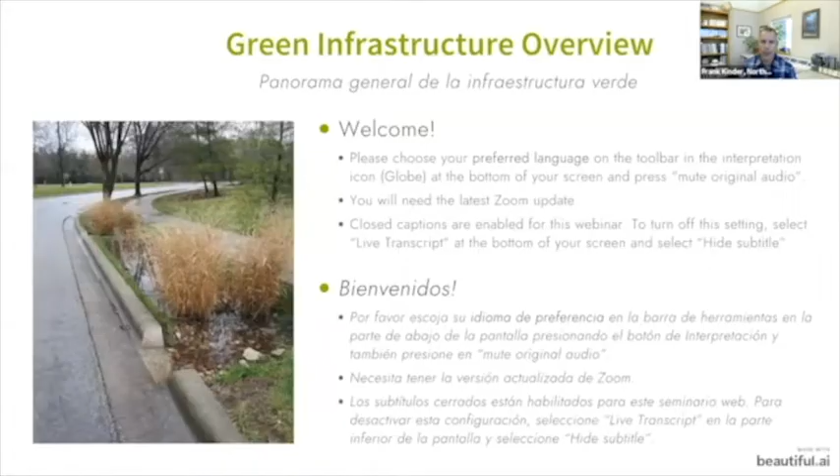Just a quick background about who we are. Northern Water is a conservancy district located in northern Colorado, and we serve over 1 million people in 1.5 million acres along 33 cities. Some of our metrics here are for you to review. If you've been up to Rocky Mountain National Park and seen some of those beautiful reservoirs, the water in those regions is gathered from the crucial watershed, much of which burned last year, making water management and water quality and stormwater management ever more important.

Some of that water is shipped over to the eastern slope, stored in large reservoirs known as Horsetooth and Pinewood and Carter and Boulder, and then delivered to all of these cities. As we receive precipitation on the eastern slope, we seek to manage that so that we can get good quality and deliver that water downstream.

As the supplemental water provider in the region, we have an obligation to help people understand and appreciate the scarcity of water and what it takes to deliver it, as well as how to take care of it and treat it with respect. We're doing that with you today here.

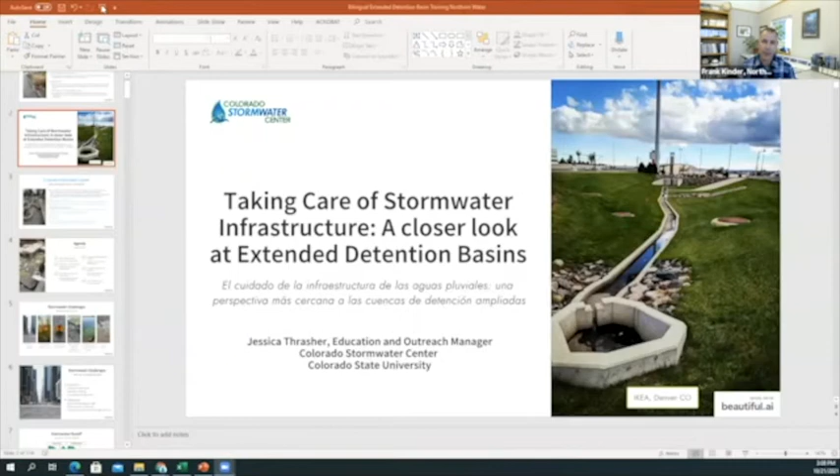The other thing we do is work with communities who have stormwater management needs to transition some of the high water use landscapes in detention basins into lower water use landscapes while retaining their existing performance. That basin you see on the right is using Kentucky bluegrass, irrigated and maintained through mowing and chemical treatments. It's possible this could be transitioned into a native turf, which would still perform the same quality requirements at the end of the day with a little less input from natural resources.

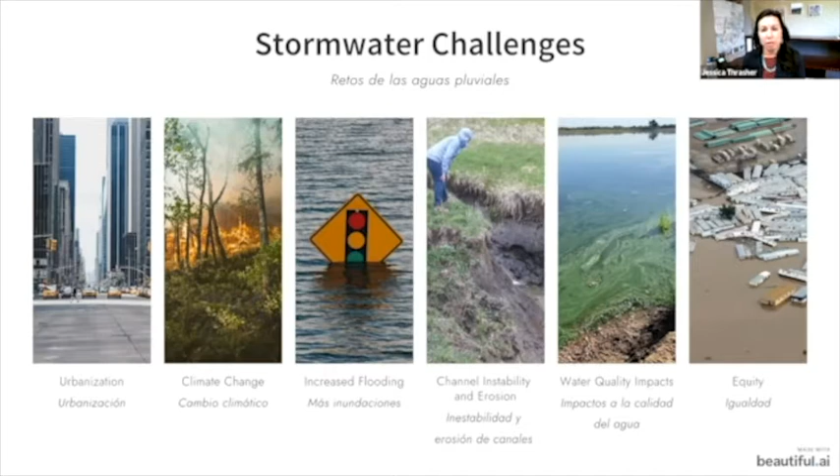To start, let's discuss the stormwater challenges we're seeing in our environment. The first one is urbanization. With urbanization, we see the removal of green space. As our cities expand, we are paving over areas that were previously vegetated, and so we're getting decreased infiltration as a result. Because of that decreased infiltration, we're seeing increases in stormwater runoff.

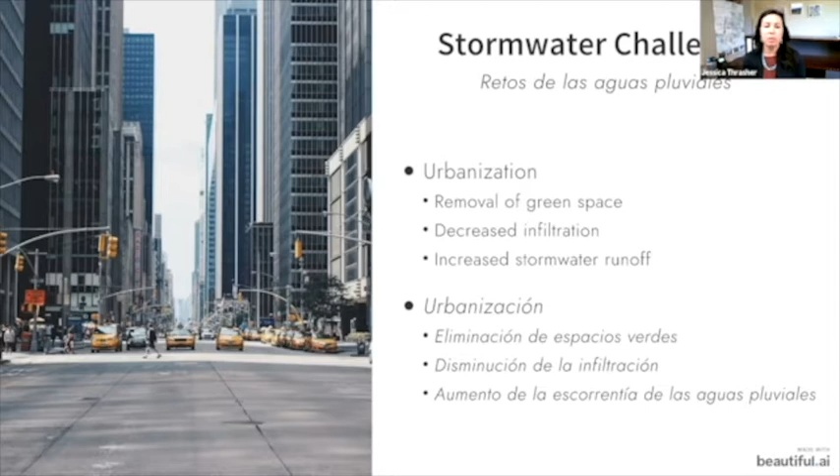One reason we need to address stormwater is because of the pollutants it picks up. As rain hits your roof and runs down into downspouts and across pavements, driveways, and parking lots, it picks up pet waste. Fertilizer is a huge issue as people fertilize their lawns. Frank mentioned a way we can decrease some of that need for fertilization by transitioning to native grasses. Motor oil is also picked up in stormwater, along with detergents and chemicals, and all of this is deposited into our waterways unless it is first cleaned by a stormwater control measure.

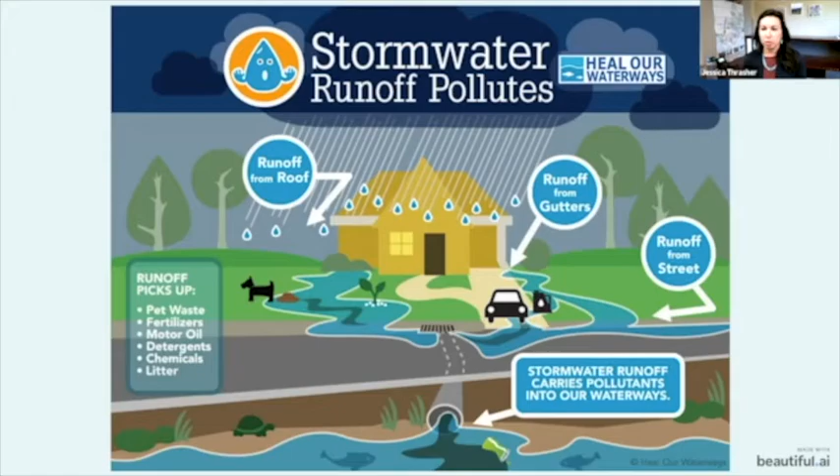In addition to urbanization, we also have climate change as one of the challenges with stormwater. With our droughts, we're seeing drought as more of the norm instead of the exception. This impacts our forests, because our forests are more dry. And when we have fires like we saw last year, it's a hotter wildfire and it lasts for a lot longer, because the trees aren't able to withstand the normal fires they had previously.

There are a lot of impacts on water quality with fires. If you want detailed information, I encourage you to check out the Stormwater Symposium. But when a wildfire burns extremely hot, it makes the soils hydrophobic. They're no longer able to accept that runoff or moisture. So when the snow melts, that water runs off of those soils in burn areas, and it picks up sediment and debris, depositing it into our rivers.

This becomes a very major issue on a lot of different levels, but just at the municipal level, Northern Water has been doing a lot of work on this. If there's a certain amount of sediment and pollutants in the rivers, it's very difficult for water providers to remove those sediments because it creates difficulties in their system. So the city of Greeley had to actually let water flow down the Poudre River this year and not remove it, because it had too much contamination from those burn areas. This is a substantial impact on our water.

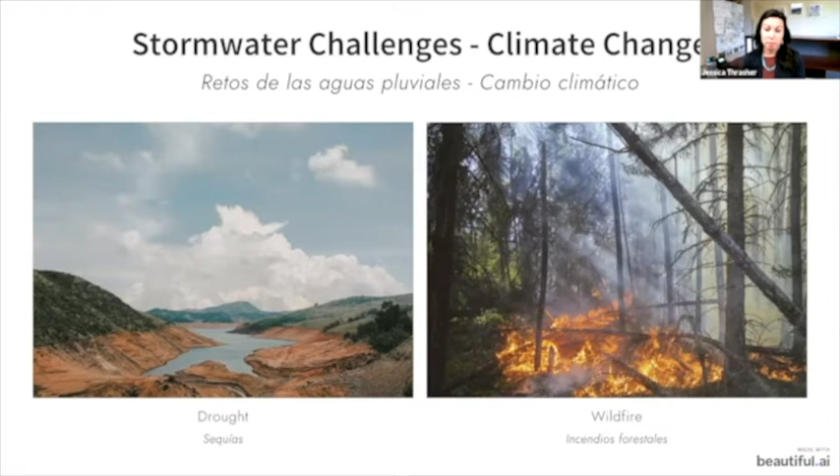We also have flooding issues with that increase in stormwater, as I was mentioning before. This looks like nuisance flooding, which causes damage to property and creates dangerous driving conditions. It also affects cities—if you want a walkable city, but the sidewalks are flooded, you're not able to do that.

In addition to nuisance flooding, which makes things more dangerous with minor property damage, catastrophic flooding refers to the complete loss of property or loss of life, like we saw in the Poudre Canyon earlier this year. Additionally, you can have channelization occur with this higher volume of water.

Channel instability and erosion is an issue because as stormwater flows across a vegetated surface, that water infiltrates into the vegetation. When it does that, the pollutants in the water are removed and trapped in that soil profile. As that water goes down into the groundwater, it is cleaner.

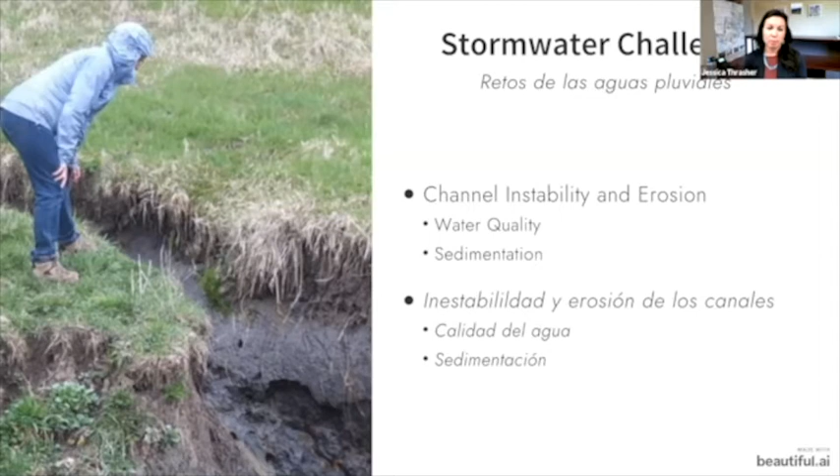When you have channelization and water cuts a path through that vegetation, those contaminants are released into the water once again. And then you have the additional component of sediment also being added to the water.

When the fertilizer and other contaminants reach our reservoirs and bodies of water, we have the potential for algal blooms, which cause hazards to human, pet, and aquatic health.

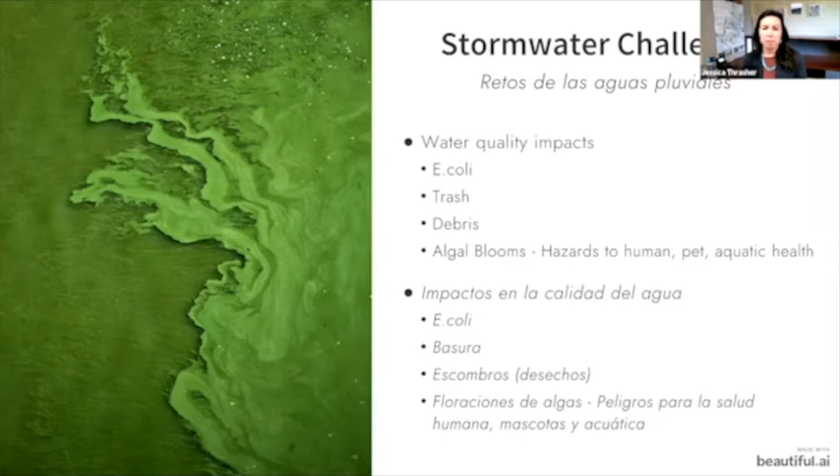Finally, along with these stormwater challenges, as we have climatic changes—increases in drought, increases in flooding—those challenges impact our vulnerable populations the most. So one of the challenges we're seeing right now is around equity. As we make adjustments to our stormwater infrastructure moving forward, we need to ensure that vulnerable populations, especially in low-income areas, are brought into the conversation so that we can have sustainable infrastructure moving forward.

Okay, now I'm going to start talking about the different types of stormwater control measures. Extended detention basins are only part of one of the different types. So we'll go into what those different types are and then focus in on extended detention basins.

The Mile High Flood District, which was previously the Urban Drainage and Flood Control District, created this 4-step process for stormwater management. Step 1 is to reduce runoff, which can be achieved by LID, low impact development, or MDCIA, which is to minimize directly connected impervious area.

Directly connected impervious area is when you have your roof connected to your aluminum or steel downspout, to your concrete sidewalk or driveway, to your concrete curb and gutter system, to your concrete or metal piping. That is directly connected impervious area, where nothing is able to infiltrate. So by reducing the directly connected impervious area, you're allowing more opportunities for that water to infiltrate. That's step 1.

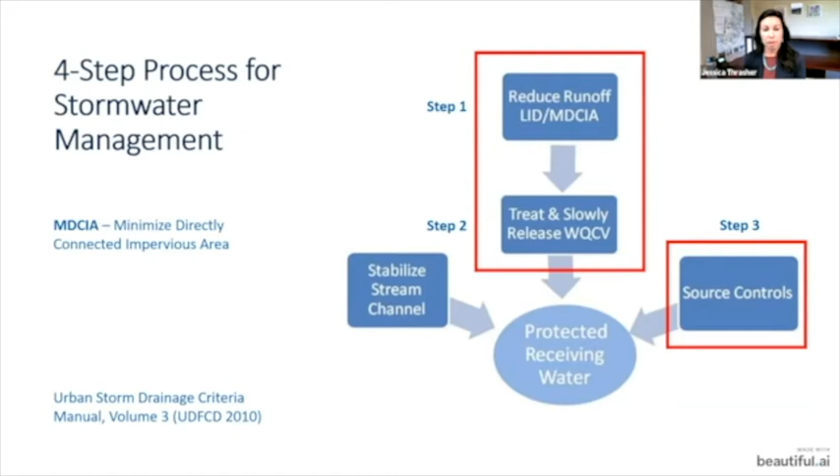We're not going to talk about step 4, which is stabilizing the stream channel, but that's another step for stormwater management. I know this lettering is very small, but you'll receive this slide later to look at in greater detail.

Stormwater control measure classification is below, and I want to read this to you: a permanent water quality stormwater control measure is a facility designed to reduce stormwater runoff, peak flow, and/or pollutants before they discharge into receiving water. That's how it's defined.

There are three different classifications we talk about with stormwater control measures. The first is sedimentation - extended detention basins fall under this classification, as do constructed wetlands and wet ponds. The next classification is filtration stormwater control measures, which include rain gardens, sand filters, and permeable pavement. The final classification is volume reduction, which includes grass swales, grass buffers, or green roofs. Proprietary systems are underground systems, and they're their own special classification.

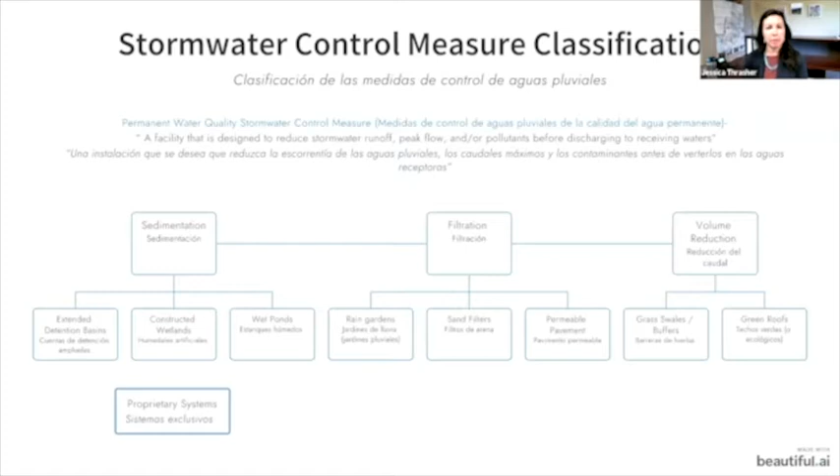You also cannot use mitigation wetlands as stormwater control measures for the same reasons. So constructed wetlands are a specific type of stormwater control measure used for that purpose, but they have the additional benefit of providing many of the same benefits as a natural wetland. Similarly, wet ponds and retention ponds are also a sedimentation SCM example.

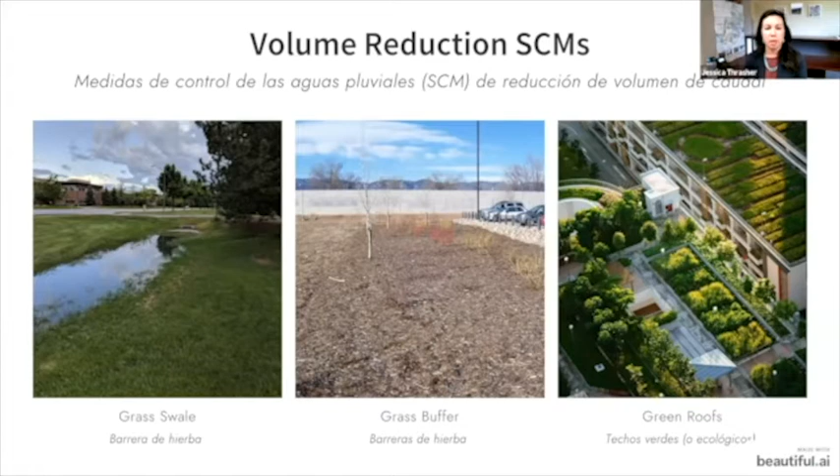Stormwater control measures are required by the Clean Water Act, especially for municipal separate storm sewer systems, or MS4 permits. When those are issued, they're regulated by the Colorado Department of Public Health and Environment, or CDPHE. As part of this permit, you are required to maintain the stormwater control measures to ensure long-term sustainability or operability, and there are audits conducted by CDPHE or EPA to ensure they are being maintained and operating correctly.

Why is maintenance needed? Maintenance is needed on stormwater control measures because they are designed to capture and slowly release stormwater, and as they do so, particulates drop out of the water - that's their function. If you don't clean them out regularly, they contribute to more pollution downstream. A clogged outlet structure, which we'll discuss in detail later, can result in standing water because the water cannot get out through the outlet, or water bypassing the stormwater control measure and being released inappropriately. That water is not being treated, so it becomes a source of pollution.

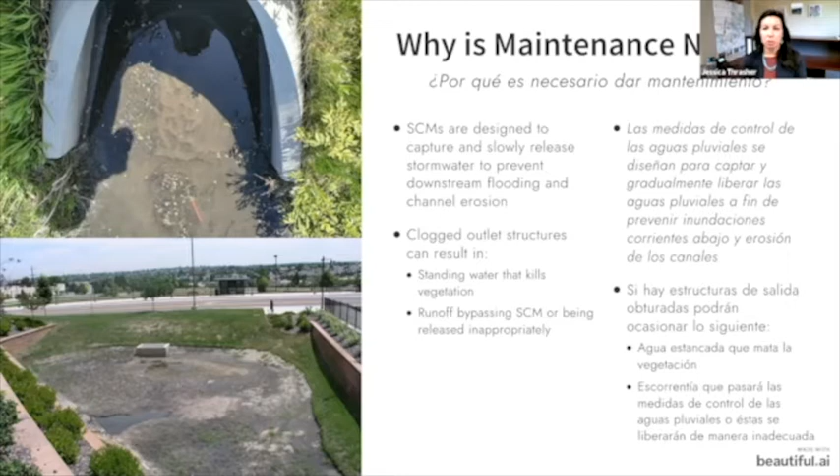As I was saying, stormwater control measures are designed to remove trash, debris, and pollutants from the water. If they are not treated, then they add more pollutants than they remove, and that is not the goal of stormwater control measures.

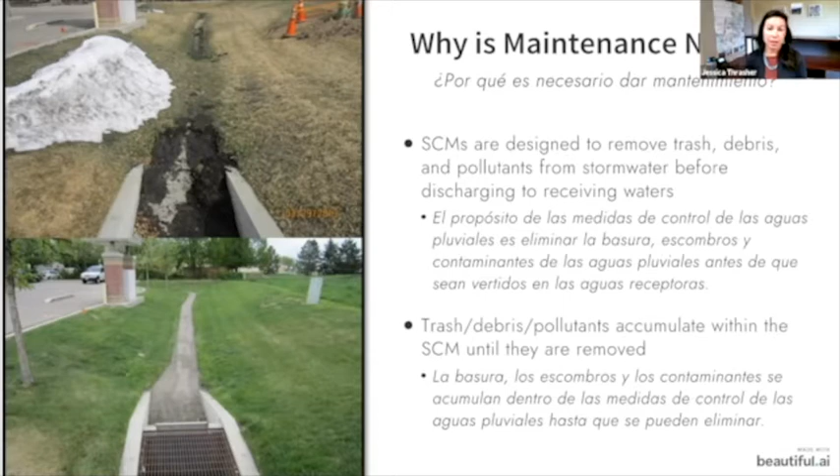As you can see here, this one has not been maintained correctly. The water that comes in is relatively clean, but the water that goes out is dirtier than when it entered, because it's clogged and not performing as it should. Especially if these are in HOA areas or areas that benefit the community, this becomes unsightly and unattractive, and not something people want to be around.

Stormwater control measures are not being maintained usually because it's believed to be too expensive. The owners don't know that they're responsible for the maintenance, or they don't even know that they actually have this stormwater control measure on their property, that it's theirs and that they are responsible for that maintenance and inspection.

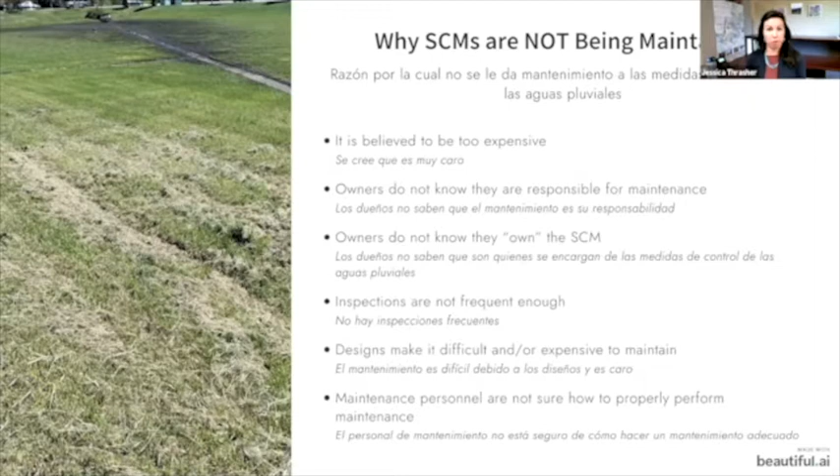Potentially it's because inspections aren't frequent enough, even if the owners do know they own it and are required to maintain it. Inspections happen at irregular intervals, so they don't know what needs to be maintained. There are some older designs that made maintenance very difficult and expensive. And finally, maintenance personnel are sometimes not sure how to perform the maintenance or what the extended detention basin needs, which is why they're not being maintained to that level.

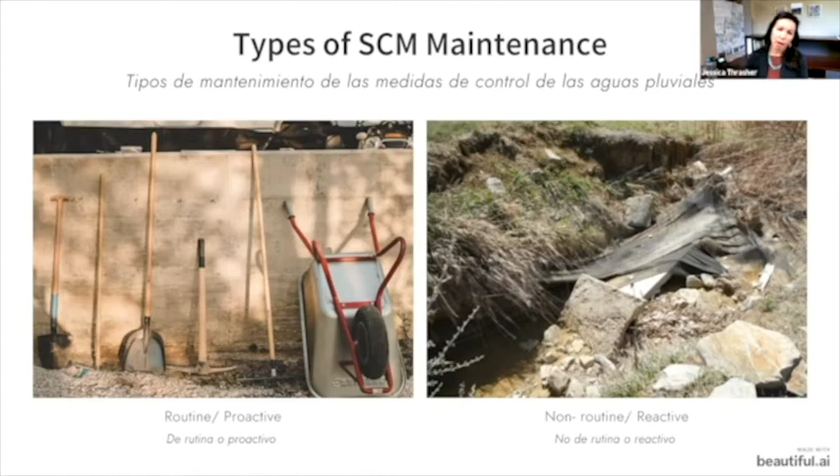There are two different types of maintenance: one is routine or proactive maintenance, and the other is non-routine or reactive maintenance.

Routine maintenance is the result of frequent inspections. You don't need specialized maintenance personnel or equipment. In some cases, for the SCM, you might just need a shovel to clean out the inlet or outlet, but for a very large stormwater control measure you might need different equipment like a skid steer. You don't need specialized expertise hired to come in and maintain them, and routine maintenance is the lowest cost.

Non-routine maintenance is the most expensive. In this picture, this was at an HOA that was not aware they needed to maintain this property, or thought it was too expensive to maintain originally, which led to them not maintaining it at all.

This is actually a trickle channel, and I'll show you an example of that in a few minutes. But this trickle channel collapsed, and it cost $25,000 to fix it.

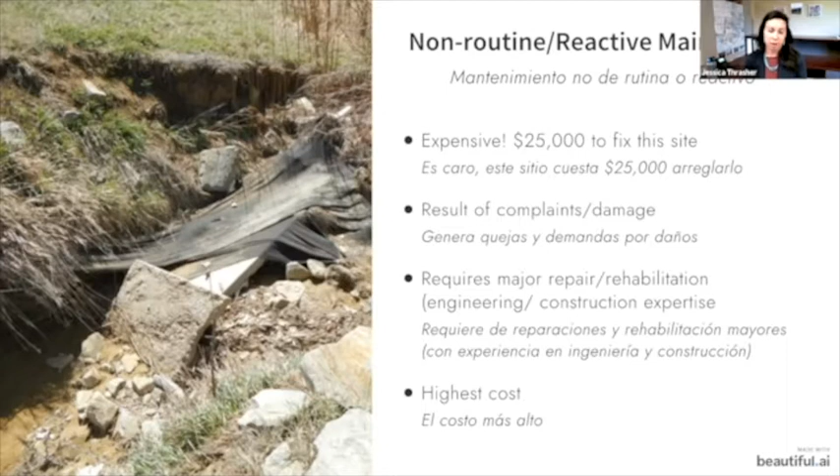When a situation starts to look like this, you get complaints and potential flooding issues. It requires major rehabilitation, and you have to hire engineering and construction expertise to bring in concrete and have it regraded. So it's very expensive, and you don't want to get to this point.

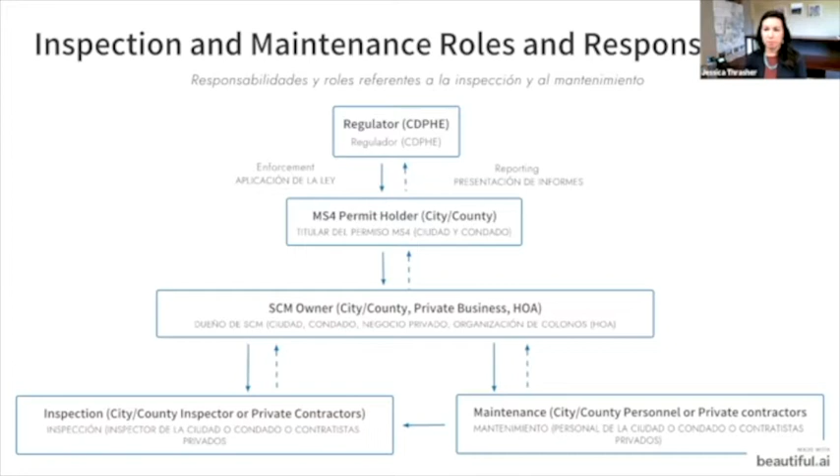For the owner of the SCM, they need to be budgeting for the proper inspection and maintenance. They definitely need to keep all documentation of the inspection and maintenance on site, and then maintain a written maintenance plan as well, because the MS4 permit holder, when they do their audits, that is what they will be checking for.

The inspector, when they go out and inspect, needs to look at what is currently happening, what are the current maintenance needs, but also look to the future to determine what will need to be maintained quickly. The inspector may not know when the maintenance personnel will be coming out, and they may not be close together. For example, if the inspector comes out in springtime, they might notice clogging of the outlet and sediment that needs to be removed. But if maintenance personnel isn't coming out until fall, they'll need to also note that leaves will need to be removed, and additional sediment will have accumulated by that time. So inspectors really need to look at what's currently happening and look forward to see if there are other issues coming down the road until maintenance personnel are able to maintain the stormwater control measure appropriately.

Additionally, identifying any design problems. This could be that when it was designed, for example, the forebay or area near the inlet doesn't allow maintenance personnel to get in there with the appropriate equipment they need. So if the inspector notices this and talks to the owner about it, saying it would be cheaper to do a small redesign of this area so maintenance is cheaper in the long run, the owner might take that under advisement. That could really help the long-term sustainability of that stormwater control measure.

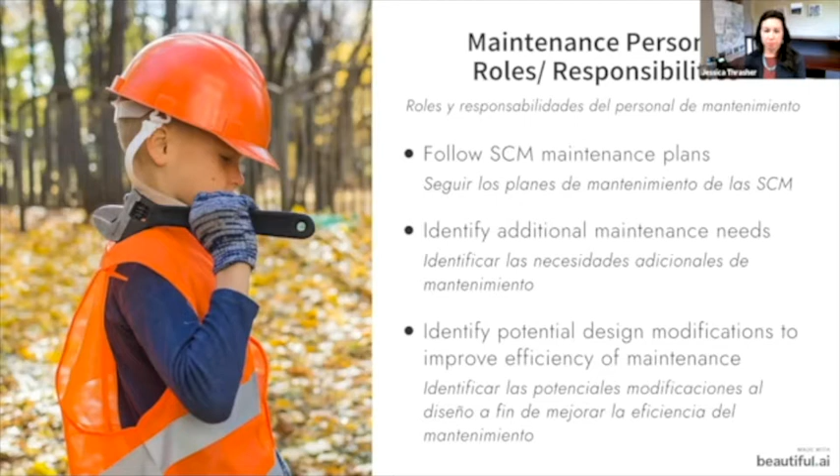Landscape contractors also play a great role in this. They are on site and potentially see the stormwater control measures multiple times during the summer months, and potentially in fall or winter months as well. So when you're out there, look for the stormwater control measures at the sites you're visiting. You can be a point of education for owners, letting them know they are responsible for inspection and maintenance of their stormwater control measure. You could even offer services to inspect and maintain these, serving as inspectors and maintenance personnel for privately owned stormwater control measures. We have a certification course for inspecting and maintaining, which is one way you could add to the services you offer your clients.

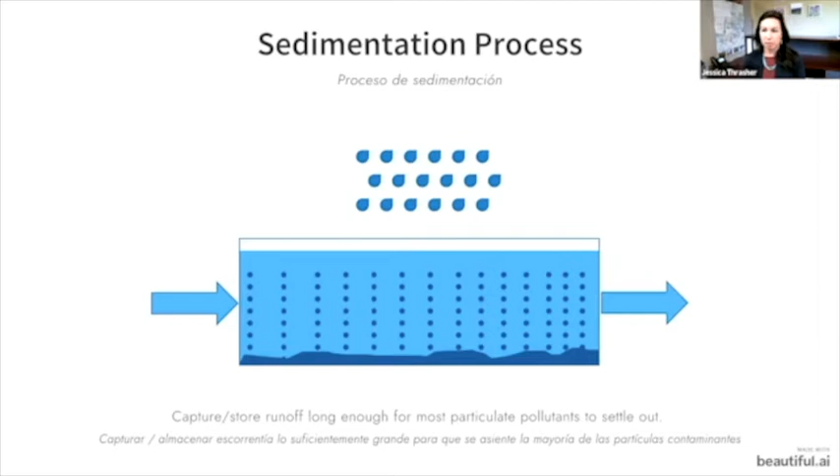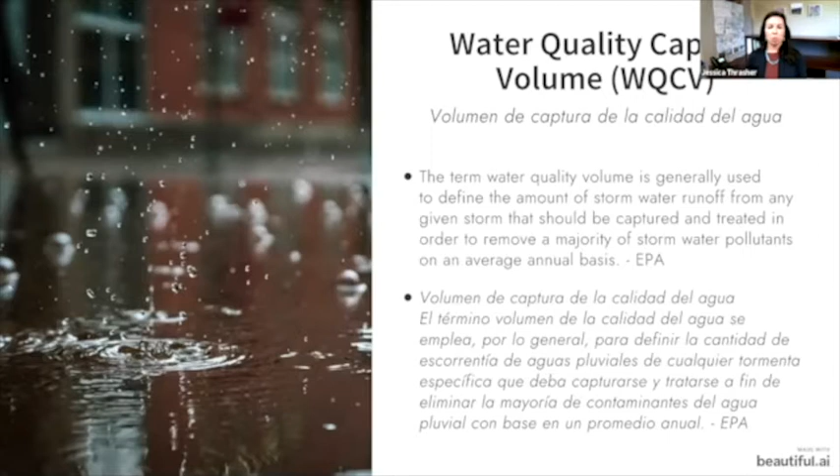Earlier, I mentioned the water quality capture volume, also called the WQCV. The EPA defines this as the amount of stormwater runoff from any given storm that should be captured and treated in order to remove a majority of the stormwater pollutants on an average annual basis. So what that means in reality is that the water quality capture volume is designed to treat stormwater runoff 80% of the time. The water quality capture volume looks at the area surrounding the extended detention basin, and it's a calculation used to determine how big the extended detention basin is by how much water will be flowing to that stormwater control measure.

The way that extended detention basin is designed is really only to hold 80% of storms. The reason why it's only 80% is because it was found that that is the most economic way to create the EDB, the extended detention basin, because a higher percentage doesn't really add that much value as far as the water quality capture volume, the removal of pollutants, but it adds a substantial cost. So when people were evaluating how big we need to make these, the civil engineers working on this, that is what was agreed upon, was that 80% of the water quality capture volume, of the storms rather.

Extended detention basins have a 40-hour drain time approximately, if they are only being used for the water quality capture volume, or that 80% of storms. These systems, the EDBs, can also be used for flood control. So in some cases, you will see the water quality capture volume is a lower segment of the basin, but then they are larger or they're deeper because these are designed for flood control as well. And in cases where they are deeper than they would originally be and are for flood control, those need to drain in less than 72 hours.

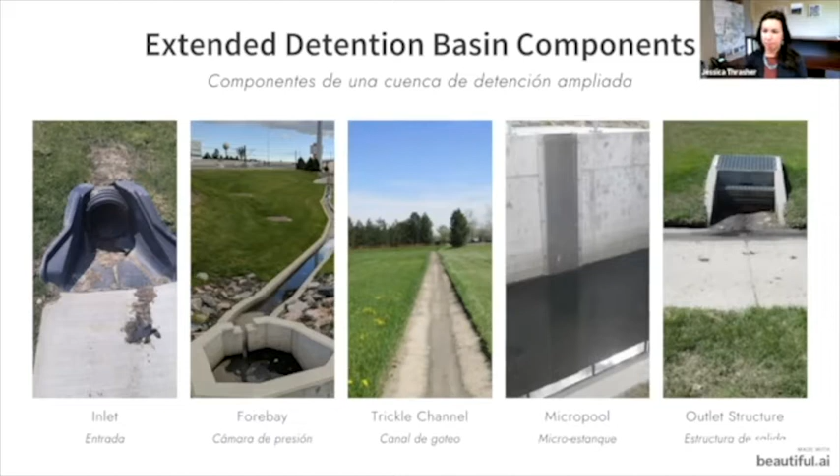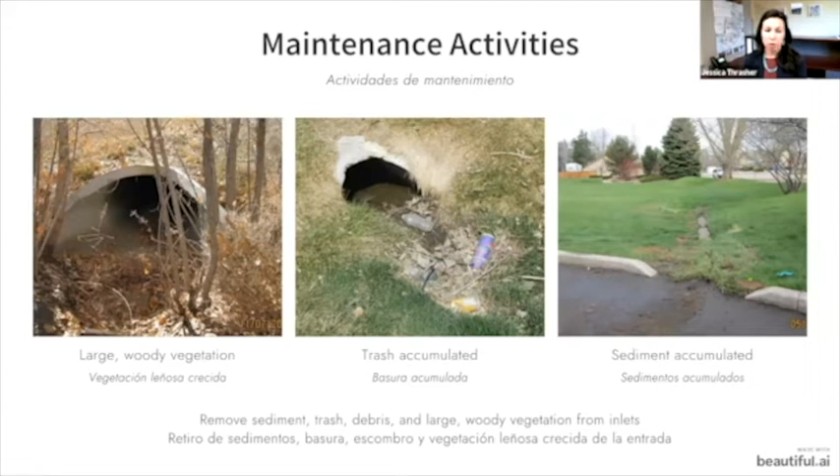This eroded sediment has completely covered the trickle channel. This is a major source of pollution for our water. Since all of this sediment is going into the extended detention basin, it's no longer able to perform at that level of water quality capture volume, because all of that sediment is going down to the bottom of the basin, filling it up. So less water is able to stay in that basin because there's less available space for it to be contained inside.

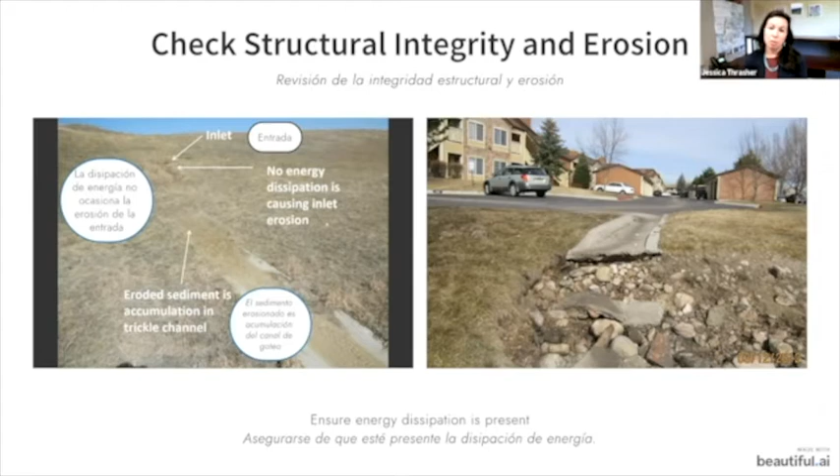Here are some examples of a clogged inlet. One of our coworkers was checking out this inlet and saw that it was clogged upstream. Didn't know why this upstream inlet was clogged, so went downstream and saw the picture on the right. What had happened here is this had not been maintained for so long that it had trash, debris, sediment, and grass growing in there. So the colleague told the owner of this extended detention basin, hey, all of this needs to be maintained and removed. Flooding is occurring upstream, and this is causing issues for water quality.

So what they did was remove all of the trash, debris, and sediment, and then put in these two tiny corrugated pipes, and then put all of the trash back in the inlet, which is not what you need to do. This was not solving the problem at all. The reason why that inlet was constructed to be that size is because of the engineering behind it for that specific size of extended detention basin. So by just putting those two small corrugated pipes in there and allowing a tiny bit of flow to come in, you are going to have upstream issues with that.

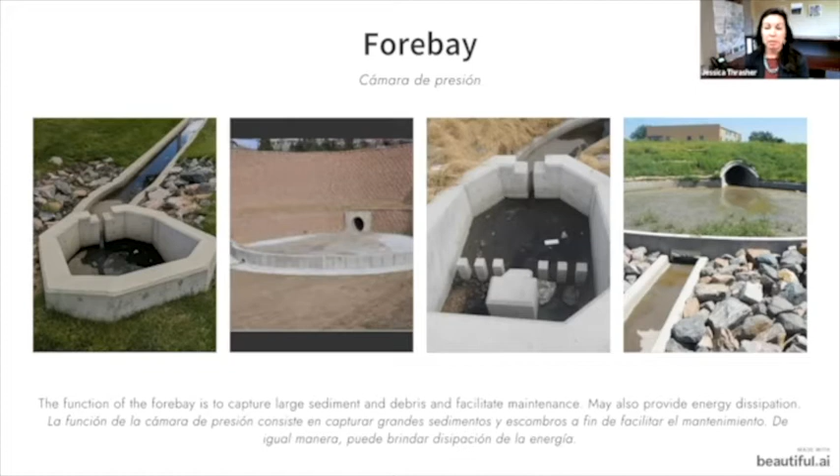Here's another example of some different types of Forebays. These should start looking familiar because in the inlet we did very similar things. You need to remove the sediment and the trash and debris, and make sure there's no large woody vegetation in the Forebay or right next to it. Forebays typically require maintenance once a year.

In the example on the left, this EDB had a Forebay. They were repaving a street that ran into this Forebay, or into this EDB. Then there was a large storm, and a lot of that material was washed into the EDB. Because they had a Forebay, it was captured and collected there. If they had not had a Forebay, all of that gravel would have spread along the very bottom of the EDB, which would have made it very difficult to remove, dangerous to be mowing in there, and in general a really big hassle to maintain. So by including a Forebay, you are making it easier to maintain your extended detention basin overall.

The next example here in the back shows a type of erosion control, kind of like a very large baffle, slowing down the water as it enters this Forebay. Here is that weir once again, the place where the water exits. All of this sediment and vegetation that's in there needs to be removed, and you can probably guess that this Forebay has not been maintained annually.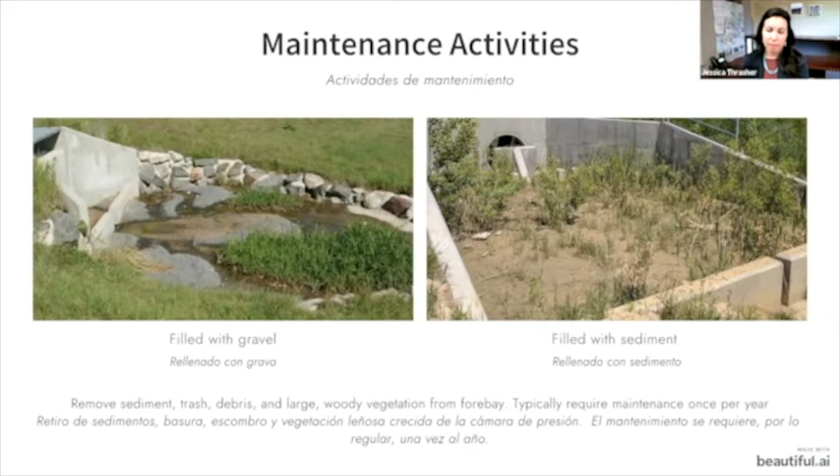One of the questions we get is, how do you know when it's time to maintain your forebay? When do you go clean it out? Usually annually, but if you see ice build up in your forebay, that's usually a sign of sediment accumulation and that you need to clean it out, because it's ponding in there due to the accumulated sediment. Another way to tell is if there's sediment on the outside of your forebay wall, like here—that means the water is pushing the sediment up and out, which is an indication that you need to clean it.

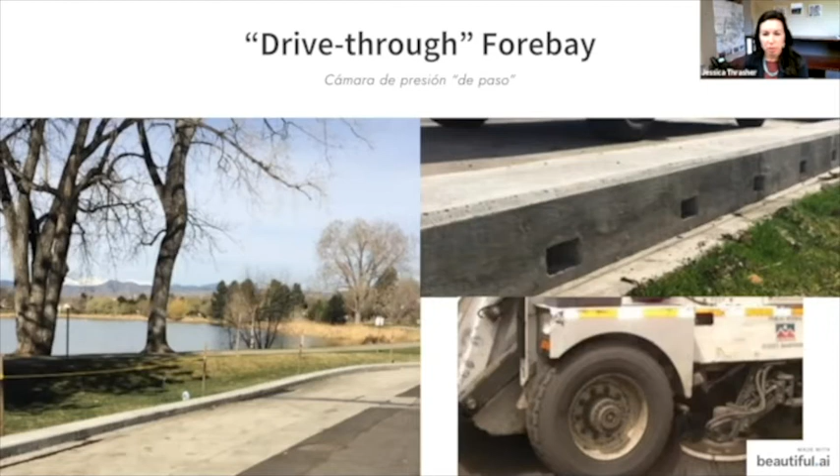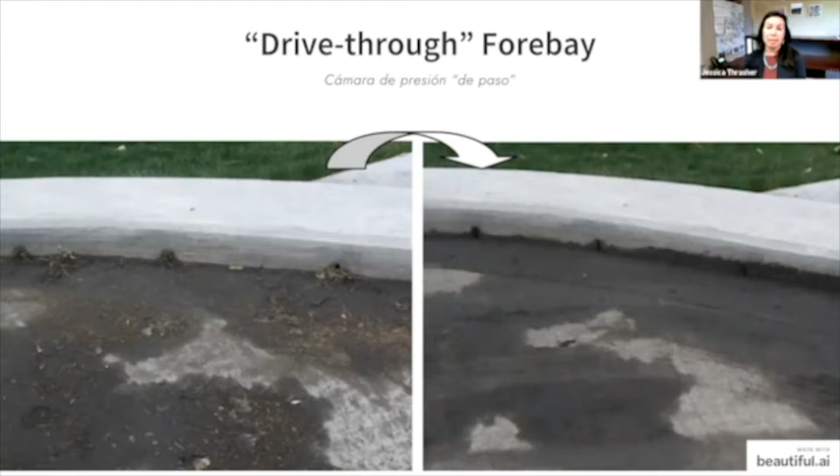But once a month they have street sweeping, and a street sweeper comes in and sweeps this forebay, which is the entry. You can see here the holes on the other side of it. And here's a closer example of what it looks like before the street sweeper and after. So they made maintenance part of their regular routine—it doesn't take additional time since the street sweepers are already coming monthly. This forebay gets cleaned 12 times a year, which works great for this rain garden. This is just an example of keeping maintenance in mind when creating a forebay, making it easy and cheap to maintain.

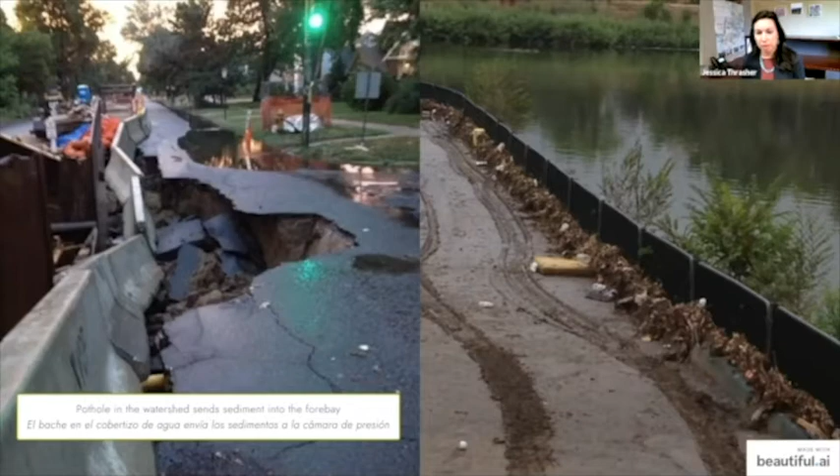So what happened was there was a pothole higher up in the watershed, and that sent a ton of sediment into this forebay. Because they had made these modifications, they were able to stop the majority of the sediment from getting into their retention pond, and it saved them a lot of time and money.

It was much easier to remove the sediment after the modification. They just came in with the vac truck and sucked up all of that sediment, and they also had a shovel there to facilitate some of that. This change really helped them in the long run, and it continues to be a functioning facility.

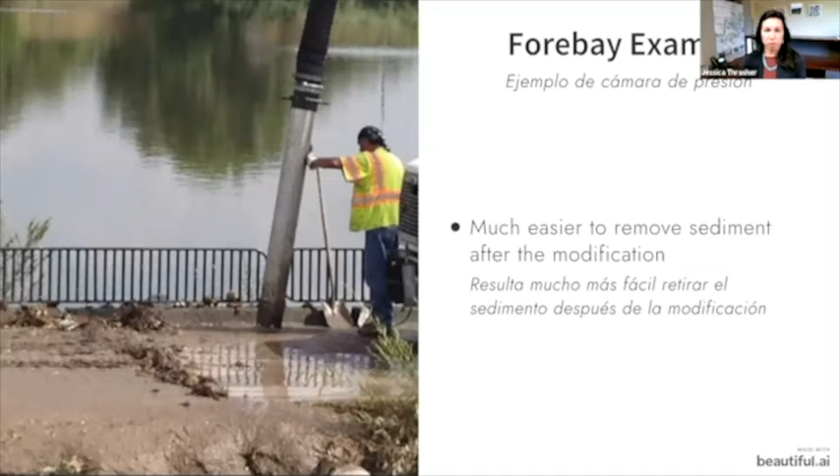If all of that had gone into the retention pond, they would have had to dredge out the bottom of that retention pond to remove all of that sediment, so that would have been extremely expensive. So in some cases, it is much cheaper to make those modifications to your forebay to ensure that the rest of your facility will be cleaner.

Next, we have the Trickle Channel, and the Trickle Channel is conveying small flows of water through the facility to facilitate maintenance. So if you don't have a trickle channel, then the water just goes on the very bottom of the EDB, and it creates kind of a soggy area that makes it very difficult to mow.

It's generally kind of swampy at the very bottom of your EDB. So the whole idea of the trickle channel is just to have this area for when you have those very minor storm events, so that it just takes water quickly from the inlet to the outlet without getting the rest of the EDB saturated.

Again, you need to remove the sediment and debris and large woody vegetation from the trickle channel. Check for erosion. There are a couple of different types of trickle channels.

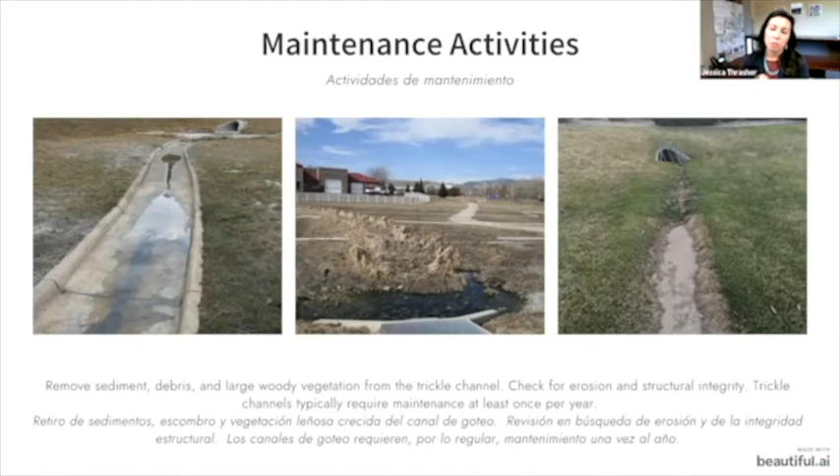In this third picture, they need to do a lot of cutting. That vegetation has overtopped the trickle channel, and so all of that needs to be cut back so that water can move quickly from the inlet to the outlet once again.

Here's a picture of before a trickle channel was maintained. You have a lot of sediment and that vegetation kind of coming together. You can see why you would need to do regular maintenance, or else the trickle channels could disappear altogether.

And then on the right, you have the maintained trickle channel, and this is a V-type trickle channel. So there's no curbing on this one, it's just a V, and so water can flow more easily into these. These tend to just work easier.

And you don't have to worry about water necessarily flowing on the side of the trickle channel instead of into it. But you still need to make sure that the soil level is up to the correct height, even in the V trickle channels.

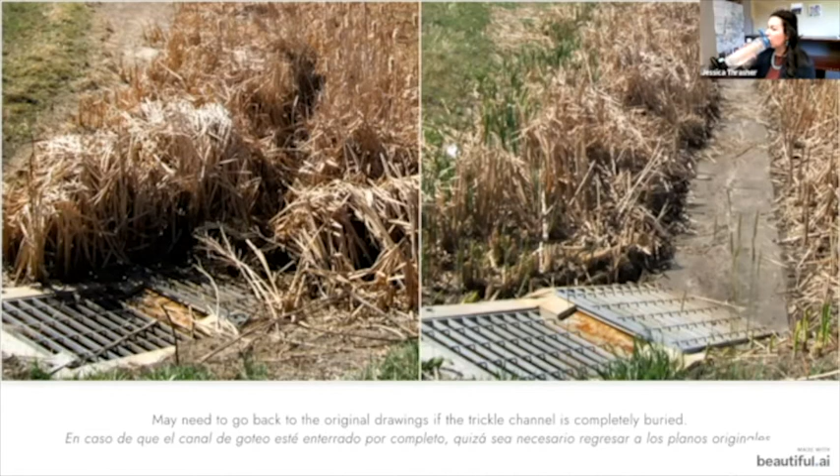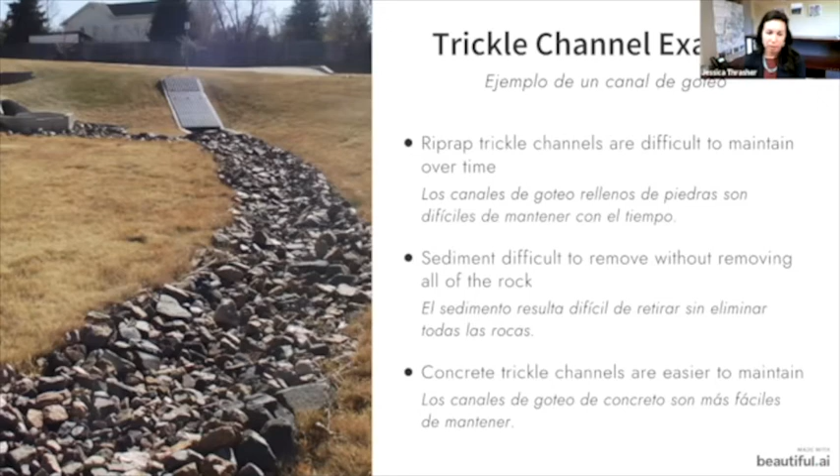In this case, they waited too long to maintain their trickle channel, so the vegetation overtopped it and they didn't know where it was located. So this particular owner, instead of finding the drawings and uncovering the trickle channel, just made a new one - that's from this picture on the right. They dug this new trickle channel from the inlet to the outlet. As I was saying earlier, when you have channelization with vegetation, all of those pollutants go back into the water, you have more sediment going back into the water, and you're decreasing the water quality. This is not what you need to do if you cannot find your trickle channel.

This caused this owner to fail their inspection. This is really harming our watershed instead of helping it, which is what the stormwater control measures are meant to do. They had to hire out an expert to come fill in the trickle channel they just made, and then create the new one. They had 30 or 60 days to do that because of how much they were polluting the watershed by doing that alteration.

The next component we have is the micro pool. Not all extended detention basins will have a micro pool, but it's important to know what they are and why we have them. It is a permanent pool of water whose function is to minimize clogging of the outlet structure. This is not a small amount of water - it's about 2 to 2.5 feet deep, and it's always there.

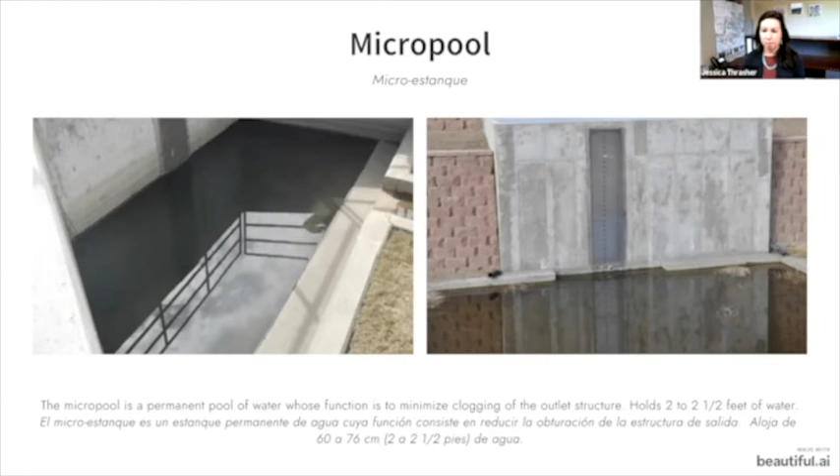The initial surcharge volume is the area of your basin that will fill up first. When you have that first initial storm surge, that's the area that will get water first, and then it will drain last. So you don't want a large area of vegetation in your EDB holding that water. You want to make the initial surcharge volume - that area that fills first and drains last - as small as possible, because if you have pooling or standing water on vegetation, the vegetation dies. So you need to consider what material is underneath your initial surcharge volume - it's better if it's concrete versus vegetation, because then the vegetation just gets killed.

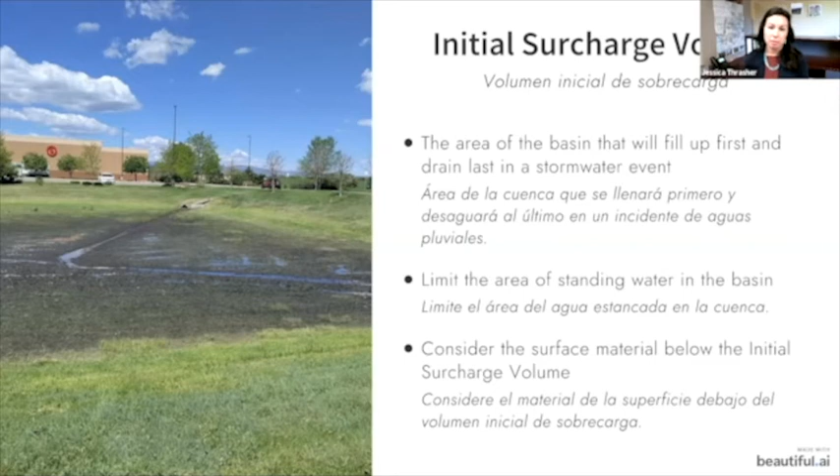So here's what that looks like. Right here we have what I was telling you before - this is the micro pool, this is the amount of water that's always there. The initial surcharge volume has been designed so that it sits on top of the micro pool, so water sitting on top of water doesn't cause any damage. This is a really great place to put your initial surcharge volume. That's just built into the design, and it can help keep your extended detention basin looking good and functioning how it should by incorporating that.

You need to maintain your micro pool, though it doesn't need to be annually. They have a vac truck, or a truck with a vacuum, come to suck up all of the accumulated sediment that has collected in this micro pool. But if you have a functioning forebay and a trickle channel that you're maintaining annually, you don't have to maintain your micro pool as often. Still, you need to be looking to remove any sediment, trash, or debris.

You can perform mosquito and algae control, and then also do a structural inspection, making sure that you don't have woody vegetation undermining your concrete structures.

One of the questions we get a lot, and why people don't like micro pools, is because the perception from the community is that they are mosquito breeding areas. They're not, because mosquitoes like to lay their eggs in a very shallow amount of water, and since these are 2 to 2.5 feet deep, you typically do not have mosquito issues in micro pools. The reason you might have a mosquito issue is if you have a ton of accumulated sediment, like in this picture. What ends up happening is there's only a small amount of water at the very top of that sediment, and then you'll have mosquito issues because it's a shallow pool of water. But when it's functioning properly and it's a deep pool of water, you should not have any issues with mosquitoes.

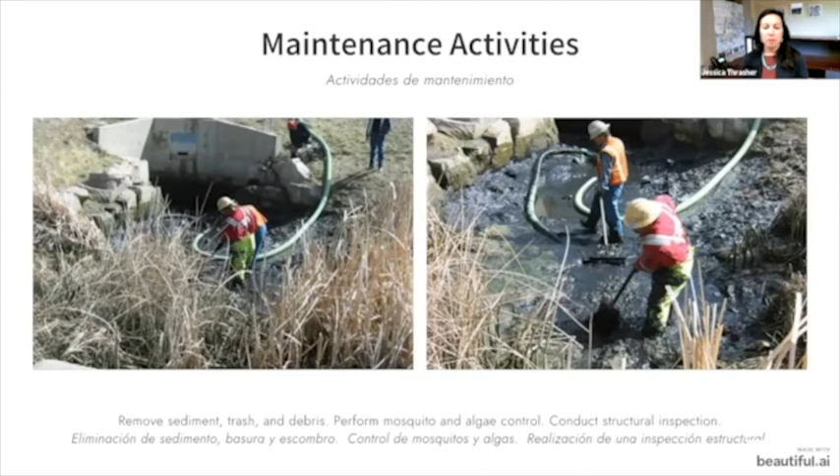So that's just for your information, kind of what typically can happen with a micro pool. Like I mentioned, you can conduct this maintenance every several years if you have maintained the trickle channel and the forebay.

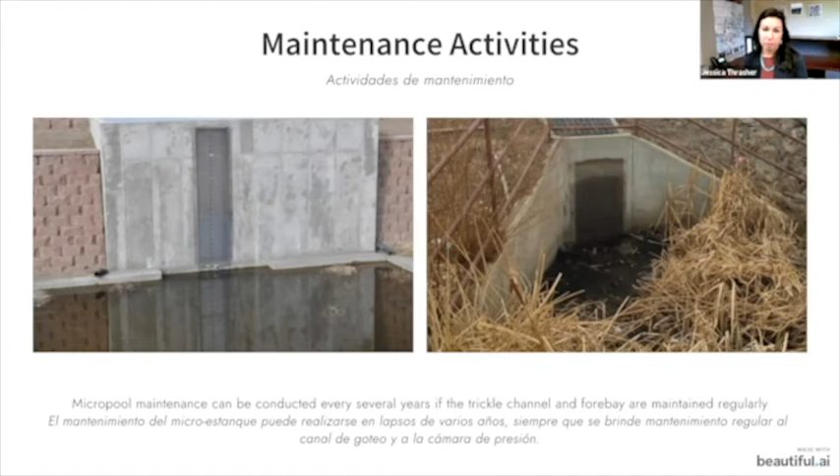As an additional component, since this is 2 to 2.5 feet of water, you need to make sure there's a way out of the water. Here it's a little hard to see, but there are steps so that if an animal falls into the micro pool, they can get out. And of course, worst case scenario, if a child or a person falls in, they're able to get out as well.

If you have a micro pool or an extended detention basin with a micro pool right next to an HOA or a playing area, the better idea might be to put a safety grate over it. That's pictured on the right here - this is the safety grate so that no one can fall into the micro pool.

Here's a picture of a very large micro pool. They've put a fence around it, and you can see the guy standing in there for scale. This is how they've performed this protection so people don't fall into the micro pool. They do have a ladder here in case someone does fall in, so they're able to get out. The picture on the right shows the scale of how large the micro pool is - here's the inlet, the trickle channel, the micro pool, and the outlet.

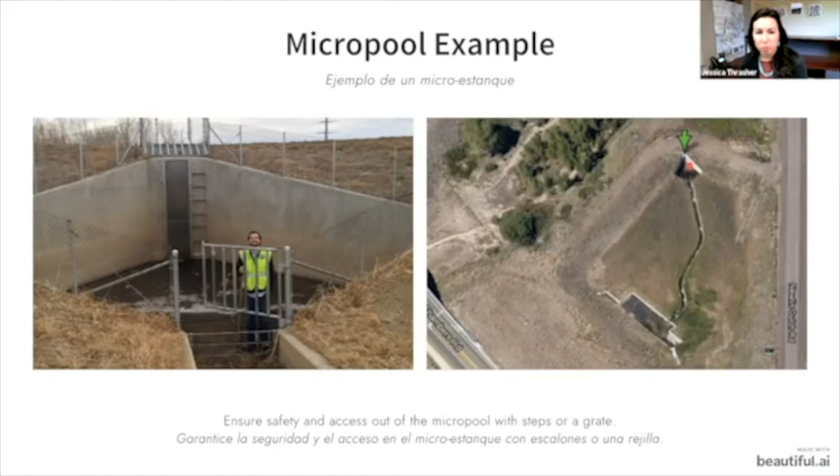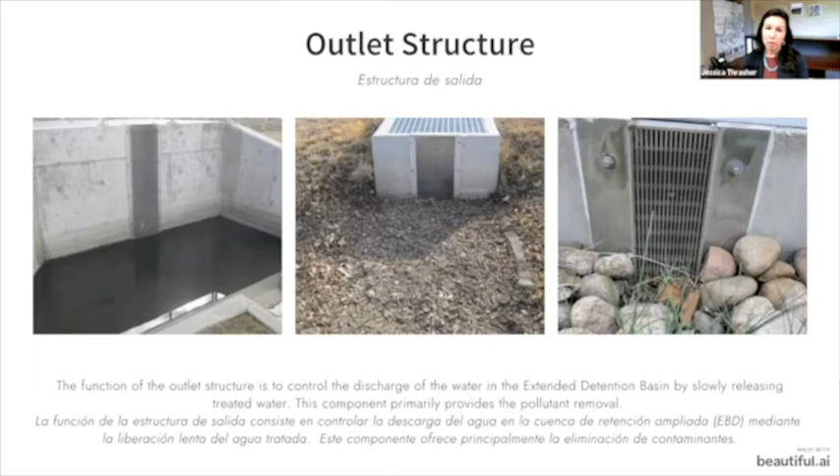The outlet structure is the component that controls how quickly water leaves the extended detention basin. It provides that pollutant removal by slowly releasing the treated water. This component provides the primary pollutant removal. Some people think the forebay does that because it captures the big debris, but that's not what ensures the water quality component - that's done by the outlet structure.

There are three different components to the outlet structure: the trash rack, which can be a well screen or an aluminum bar grate depending on the size; the orifice plate, which is the middle picture here; and then you have your safety grate. Just like there was a safety grate over the micro pool, you also need a safety grate over the top of the outlet structure.

The trash rack keeps the orifice plate from clogging, and the orifice plate provides the pollutant removal. The trash rack goes right in front of the orifice plate. The trash rack holes are smaller than the orifice plate holes, because anything that gets through the trash rack needs to be able to pass through the orifice plate without clogging it. So there are smaller holes for the trash rack, but more of them, so it's not inhibiting the flow of water - it's just keeping the orifice plate clear and allowing water to flow freely through it.

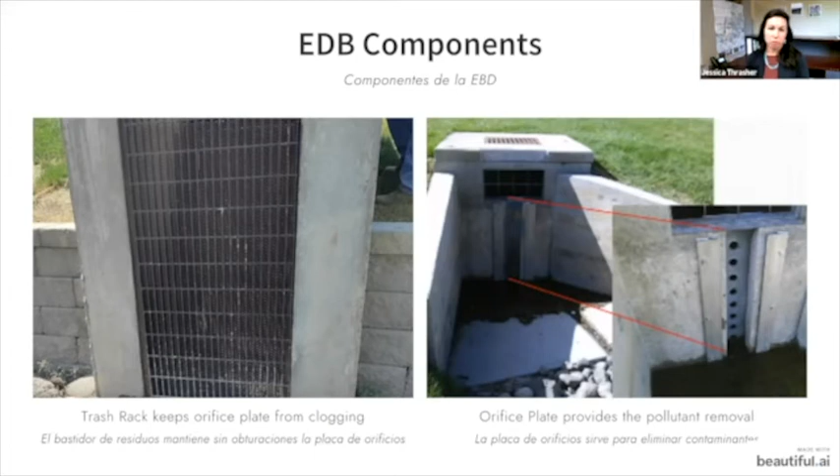When you are doing maintenance or your inspection on your orifice plate, you want to make sure that the orifice plate is firmly connected to the surrounding structure. You don't want to ever remove it unless you're replacing it, of course, but otherwise never remove it. Check for any gaps or modifications in it. You want to make sure that it's still functioning the way it should.

If there are any gaps, if it's been removed, sometimes I'll show you what people do to the orifice plate in the next slide. But if you see that it's askew or disconnected in any way, that means that water is able to flow through the orifice plate more quickly than it should. So the holding time will be less than 40 hours, which is what it's supposed to be.

That's to ensure that the sedimentation process can take place. If that sedimentation process isn't taking place, then the pollutants have not had enough time to fall out of the water to the bottom of the EDB, and they're just flowing into our storm drain without being cleaned at all. So it's very important that the orifice plate is functioning how it should.

If you have a clogged hole, something needs to be done called Orifice Restoration, and that's basically just sticking a stick in the hole to unplug it. It sounds a lot more fancy than it actually is, but just make sure that orifice hole is no longer clogged, because otherwise it's not providing the right holding time.

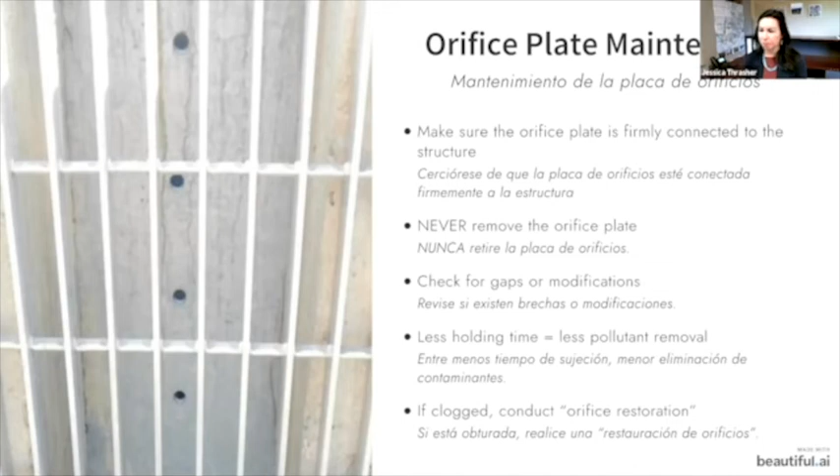Here are some examples. So people ask, how can we tell if the orifice plate has been modified? How do we know if the holes are the size they should be? Just think about it: the people who are going out and modifying these aren't carefully removing the orifice plate and going into their machine lab to make the holes slightly larger. That's just not what's happening.

They see water sitting in this extended detention basin and think, oh no, something's wrong with it, I don't want water sitting there. And they try to make the water go through it quicker. So that's why they hack away at the orifice plate. And then water does exit quicker, which, as I've already said, is really bad. That is not how this should function at all.

And this is an inspection failure. This needs to be fixed immediately because it's causing more pollutants to be put into our water bodies, and it's not providing what it's supposed to be doing.

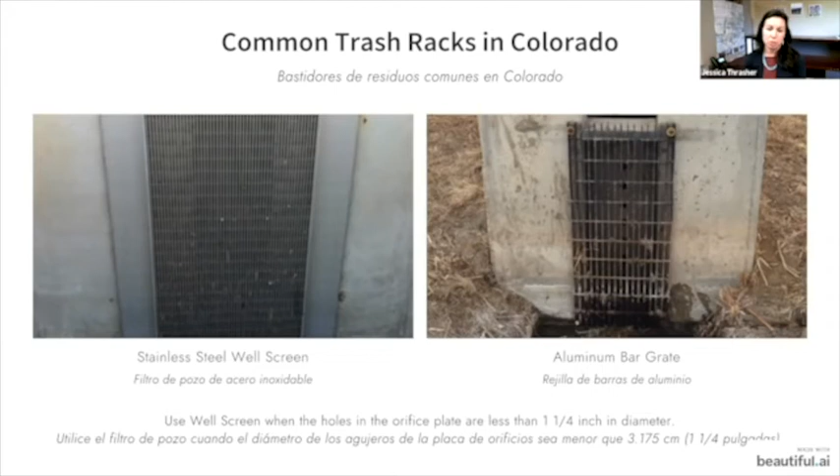For your trash rack maintenance, whether it's aluminum, stainless steel well screen, or bar grate, the maintenance is the same: you need to go and remove all of the debris and trash from the trash rack. This might be after large storm events, or it might be once a year, depending on your site.

Also make sure that the trash rack is present and attached correctly. If you don't have the trash rack there, then the orifice plate will be clogging, and if you have clogging with the orifice plate, you'll have extra holding time.

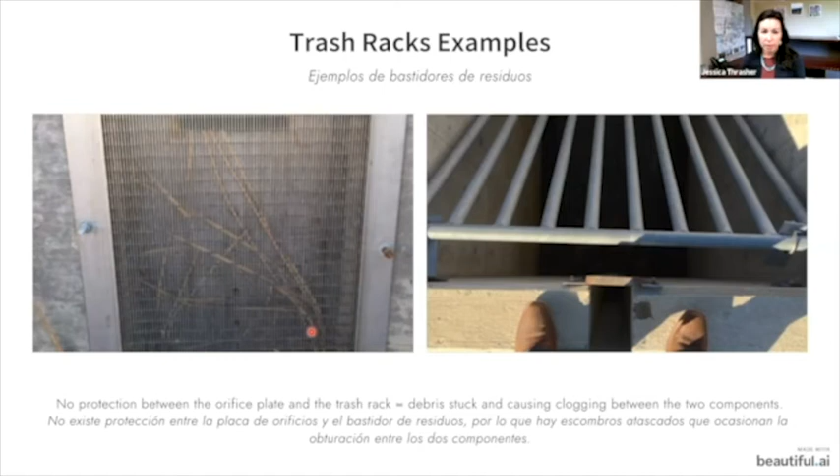You might need to bring some new connectors and some sealant with you. Sometimes the connectors will not go back into the same spot that they were before, so you need to make sure you have all the tools you need to replace those correctly and firmly.

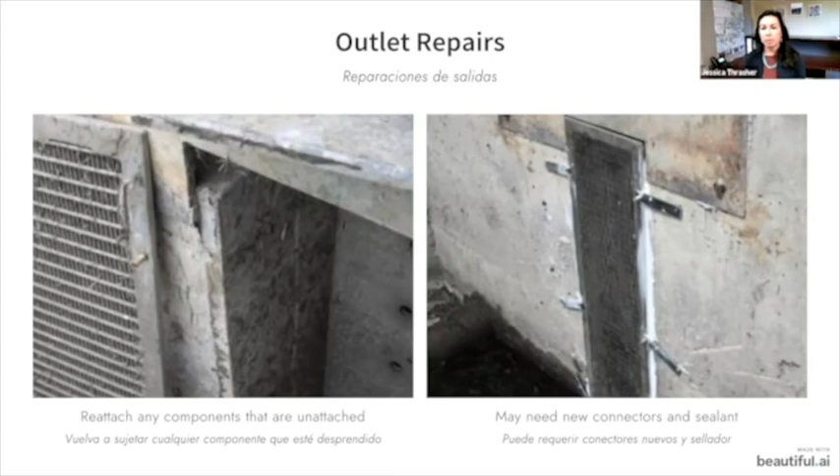Also, metal to concrete does not seal. So you need to have some sort of seal, a rubber gasket with you, or be able to bring some caulking to make sure that seals properly.

Here are two different styles of orifice plate. In the past, the orifice plates were constructed to have exactly a 40-hour drain time. Civil engineers determined, based on the size of the extended detention basin, exactly how many holes would be needed for that 40-hour drain time.

Well, because the holes were so small, they were getting clogged, so it wasn't actually a 40-hour drain time. Since that was what was happening, they determined, and Mile High Flood District was part of this, that instead of it being exactly 40 hours, it needs to be about 40 hours.

This is something you could recommend to your owner: if you go out there and see that clogging is an issue, you might recommend making the orifice holes larger. If it's an older design, we can upgrade to a single row of holes in the orifice plate and put on a bar grate instead of the well screen.

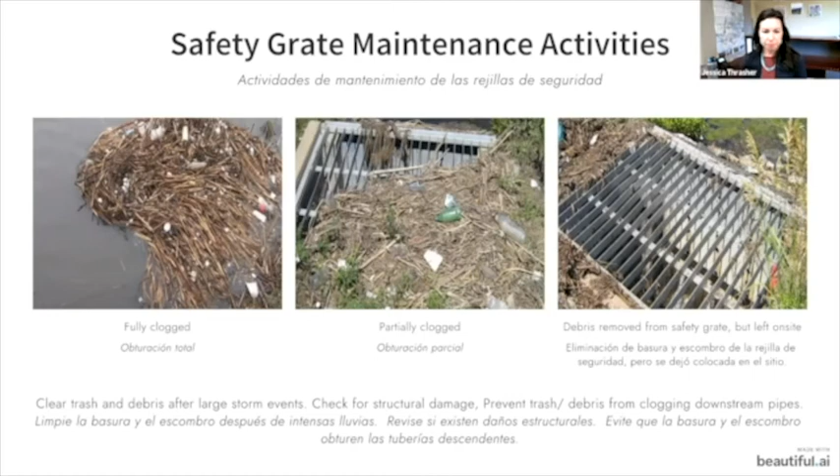So if you see this, please tell the owner that this is a failure of their outlet structure and that they need to replace the safety grate appropriately.

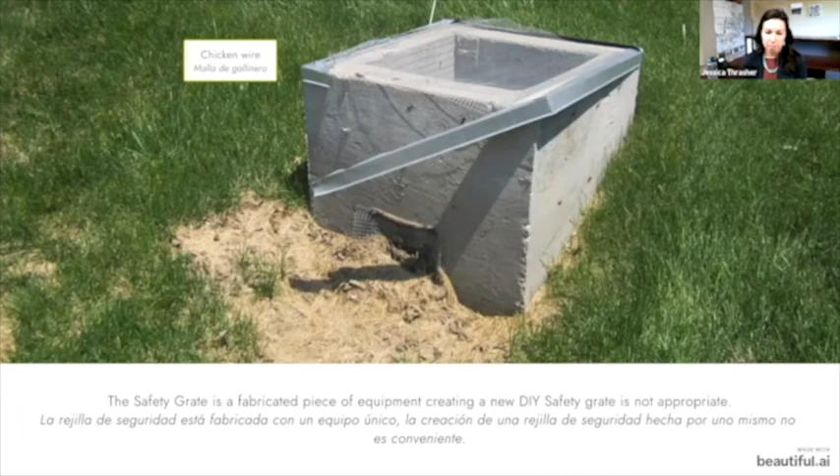Same thing for your outlet structure, still removing that sediment. You need to do this once a year. Any debris or vegetation that has accumulated in front of it, because you don't want debris and vegetation blocking the outlet structure. The outlet is where the water needs to leave. So you cannot be creating the situation where water can't get out, again, ponding issues.

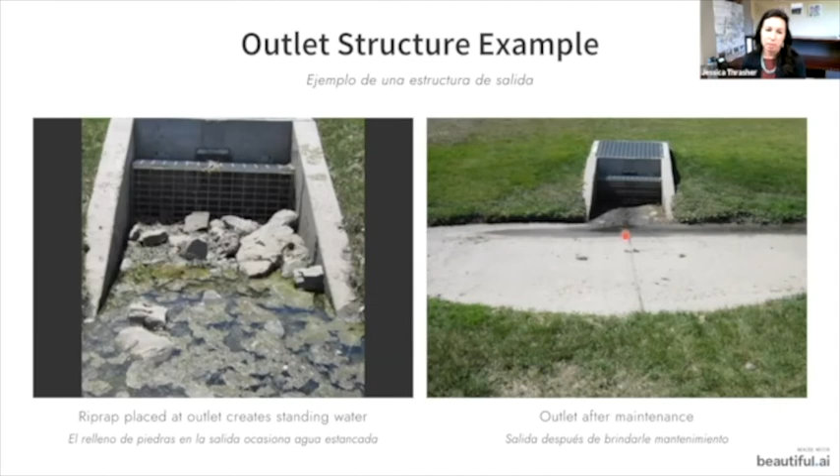In this example, this outlet structure was installed too high. The outlet structure should be at the very bottom, the lowest level of your EDB, so that water can flow in and flow out. If the outlet structure is too high, you'll just have this situation here where you just have constant ponded water. When you have ponded water, you have dying vegetation, you don't have the correct amount of pollutant removal, and you have standing water, which will create a mosquito breeding area and cause a lot of problems for the residents around this space.

So in this particular case, they needed to wait to completely regrade this extended detention basin. Sometimes they'll just wait until it fills up with sediment completely so that the whole thing has failed and then redo it. But I would prefer to go ahead and fix it so that you're not having this problem of adding more pollutants to the water and having these issues with standing water and the problems that brings with it.

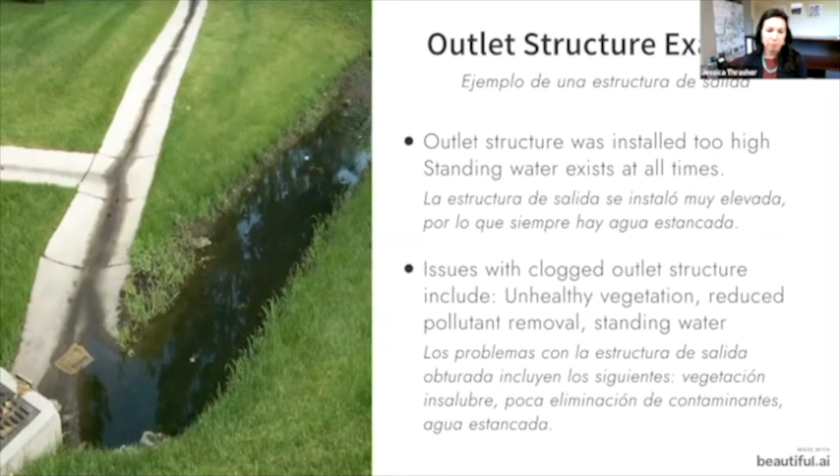Vegetation: when you have vegetation in your extended detention basin, the function of that is to stabilize the basin from erosion and also have this aesthetic benefit. You will need to establish your vegetation in some way, so having temporary irrigation is one way to do that. This would be especially beneficial for the native grasses that Frank was mentioning earlier. Native grasses in your extended detention basin will need to be watered, but once established, you will no longer need to water it, hopefully. By having this temporary irrigation in place, you can just remove it afterwards.

What you need to do with your vegetation when checking it is just make sure there's healthy vegetation and that any necessary irrigation has been provided for. Avoid fertilizers—I would rather say never use fertilizers, because with stormwater control measures, we are trying to remove pollutants from the water. When you add fertilizer to an extended detention basin, it will wash into the water and be very difficult to remove, so you're adding pollutants instead of removing them. Extended detention basins, or stormwater control measures in general, should not have any fertilizers placed on them. And when you mow these areas, you have to remove the lawn clippings. I will show you why in our examples later on.

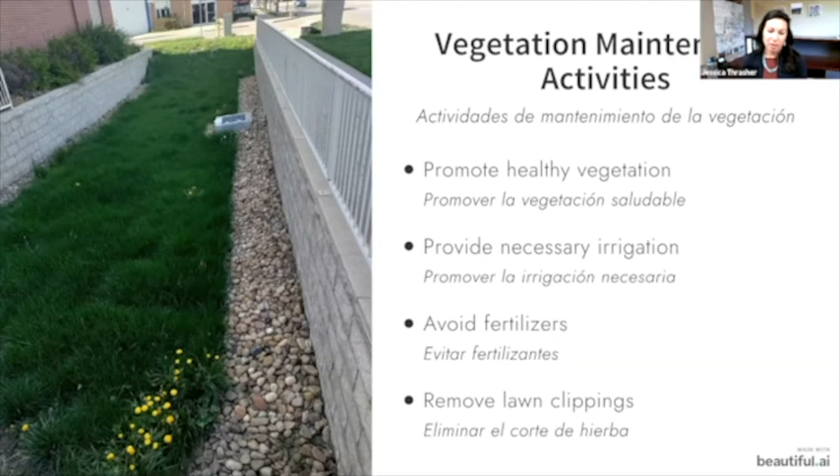In addition to ensuring healthy vegetation, you want to remove any woody vegetation growing up next to it. A lot of these extended detention basins have also become green space for people to use. So I've been asked: is it okay to have trees in your extended detention basin? It is okay, you just cannot have them next to any concrete, because that's when they start undermining them and causing issues. So as long as the tree is not next to your inlet, your outlet, your trickle channel, or any concrete, you can still have them as an additive feature in your extended detention basin.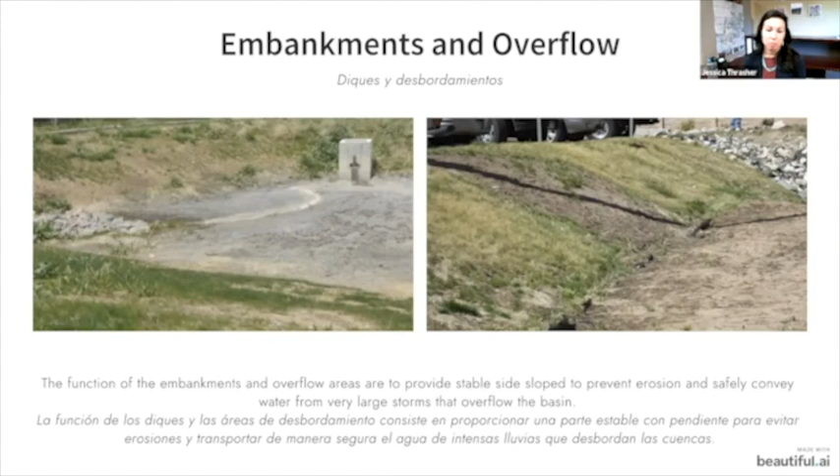The embankments and overflow area of your extended detention basin need to be stable and sloped so that you prevent erosion and safely convey water from very large storm events to the overflow area. These EDBs are designed for about 80% of storms, so 20% of the time they will overflow. Where will that overflow go? You need to manage where it's overflowing, whether it's overflowing properly, and whether the overflow area is stabilized and not creating an issue downstream with more sediment or debris.

When you remove debris from the forebay, the trickle channel, or the outlet structure, it needs to go to the landfill. You can't just use that material at a different project as fill material. If you really want to use it as fill material, you need to get it tested first to ensure there are no toxins that could harm an adjacent watershed or that same watershed. It's called the TCLP procedure, the toxicity characteristic leaching procedure, to determine if that fill material can be used elsewhere or if it has to go to the landfill. But usually it's best if it just goes to the landfill.

It might need to be dewatered. If it's too wet, it has to be dried out before it can go to the landfill. But otherwise, it is acceptable for landfill and is not considered hazardous waste.

This example is really just looking at how you maintain these sites. Is it easy for the proper maintenance to get to those areas? The maintenance roads have to have stabilized access, built for the type of vehicles that will be coming to do the maintenance, with the proper load capacity. When these are originally constructed, it's great to have that maintenance access, but if the access doesn't have the correct load capacity, you won't be able to get those trucks or maintenance equipment to the site anyway. So that needs to be part of your planning, ensuring there's access to all of these different sites.

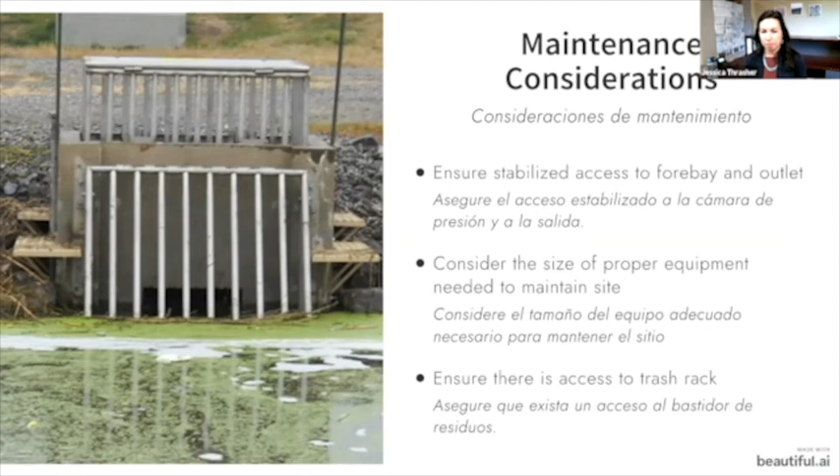Because there was no forebay removing sediment, trash, and debris before it enters the EDB, all of that trash and debris went into the EDB. It clogged the outlet structure because there was no micro pool, and micro pools help prevent clogging of the outlet structure. So this just became a mess.

Excessive ponding - we're using the same picture as before, plus an additional site we'll look at during our examples. This is because there's no micro pool, no defined initial surcharge volume. They weren't maintaining the site well enough, or it wasn't properly sized in the first place. So you get excessive ponding and the killing of vegetation - a very unfortunate looking area.

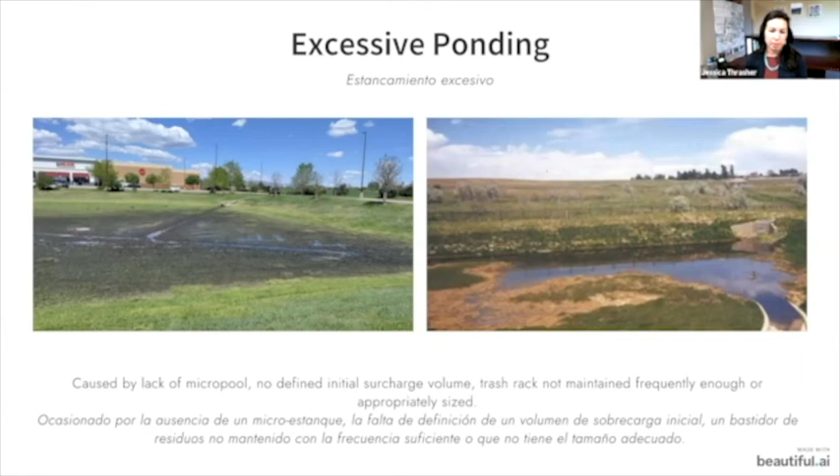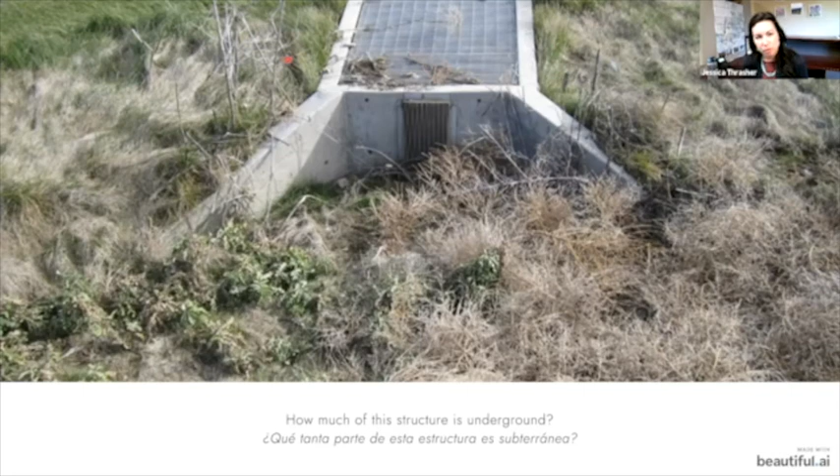You also need to make sure the outlet structures are visible. In this case, we don't even really know how big the outlet structure is because it hasn't been maintained properly, and vegetation has started to take back that outlet structure. You need to dig it out so you can see the trash rack at all times, clear away all that vegetation from this area, and cut back this area so you can see the full size of this outlet structure.

In an extended detention basin, the only components you absolutely have to have are an inlet and an outlet. But what happens if you only have an inlet and outlet? Here's the inlet, here's another inlet, and here's the outlet. There's no forebay, no trickle channel, no micro pool, and also no defined initial surcharge volume. So what you get is a mess - sediment accumulates through the entire extended detention basin, you have ponding issues, and vegetation is killed, all because those components were not put in.

So if you go and inspect or maintain, or if this is your site, you just need to look at how it could be redone. Look at adding those additional components to have an actually effective EDB that's working properly.

I'll pause here for questions before we go into the examples section.

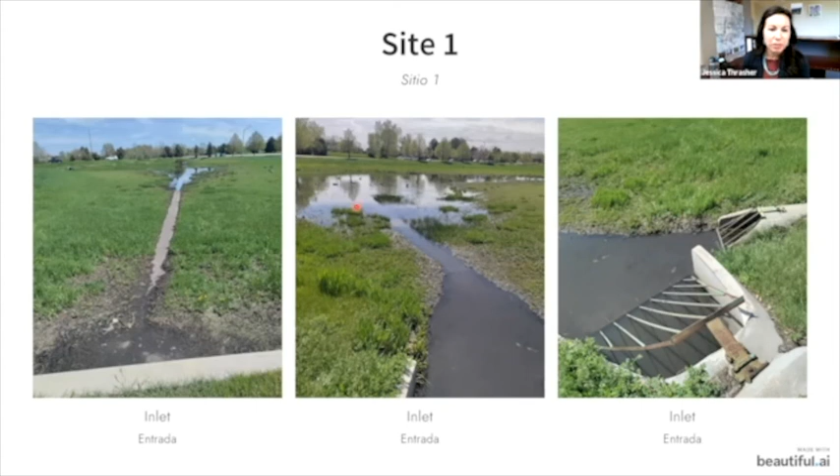You can even see some ducks back there. Actually, there's some geese. They were really enjoying this ponded area.

And then we start looking at the outlet. As I'm looking at this ponded area, I'm thinking this is too much water for the type of rain event that we had. So what is going on? Obviously the water is not able to get out of this EDB. I wonder why that is.

So I go closer and I start to see something blocking the outlet. I look closer and what have they constructed? It is a little fence with barbed wire, or with rebar and chicken wire.

The reason why this was probably put in place is because the owner was noticing, 'oh my gosh, look, here's my trash rack, it's a well screen and it's clogging all the time.' I wonder why that is. So since it's clogging all the time, I'm going to make a little fence around it so that it doesn't clog. As you can see, that did not fix the problem.

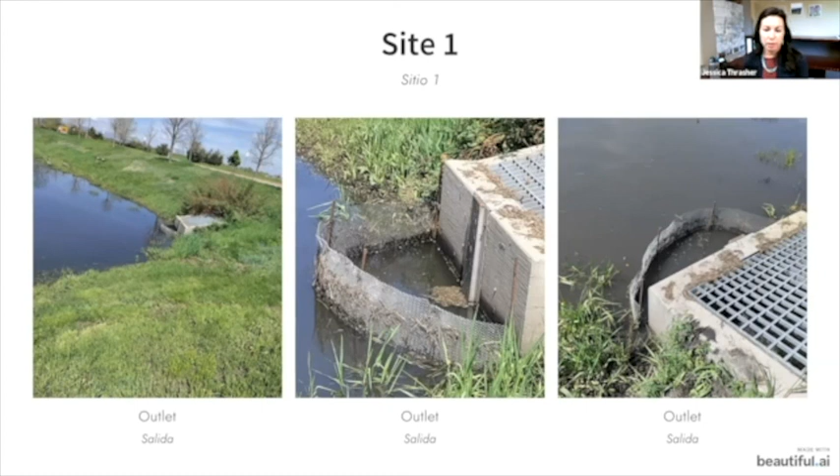What they should have done was talk about upgrading their orifice plate so they could have larger holes and still put a well screen on there. So that's just another side of how you could see that. And then here you can just see the extensive amount of ponding happening in this EDB, and a closer look at this outlet structure.

Let's see what happened 72 hours after the rain event. If you all remember, 72 hours after a rain event there should not be any water in the EDB because it is violating Colorado water law. So I go back and look at it and oh my gosh, this whole ponded area—this picture should look familiar because I use it a lot in the presentation.

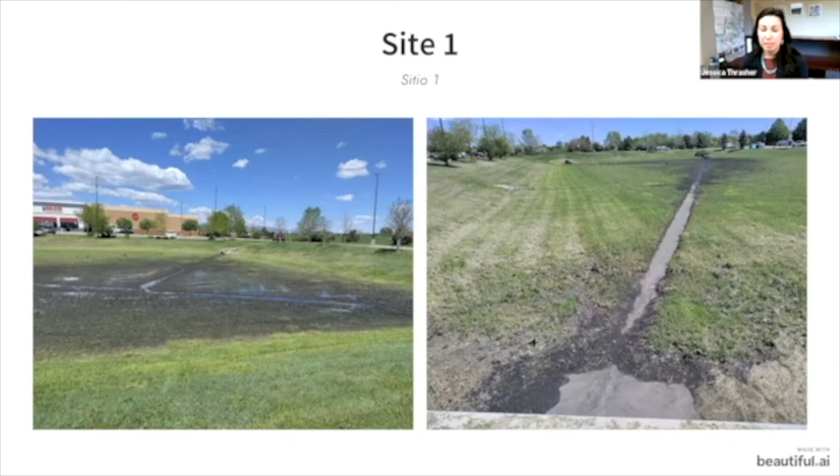Look at how much vegetation has been killed by this huge ponded area. And you can see from one of the far inlets over here that you can already see how much damage has been done by the amount of ponded water.

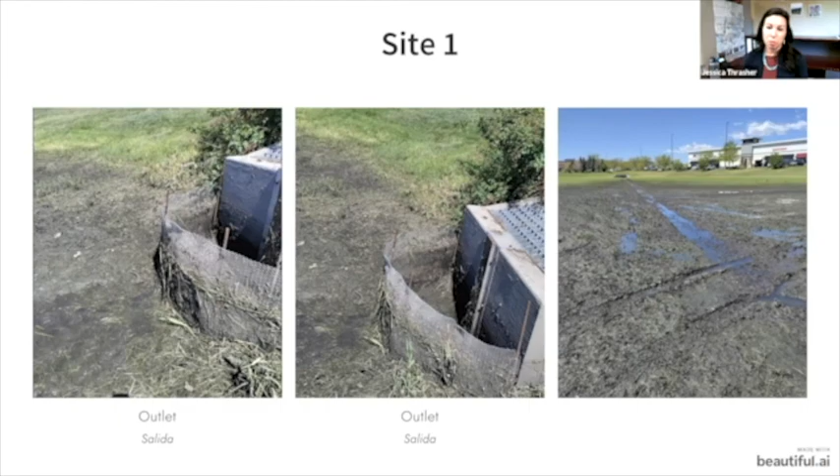Here's a different site that we're looking at. And in this site, a trickle channel is supposed to convey flows from the inlet to the outlet. Where is the inlet? There's no inlet here, so there's no purpose for a trickle channel here at all, no reason for one. That was the first thing that was noticed—they had an additional expense in this EDB for no reason.

I'm starting to see some water here, but it was 24 hours after a rain event, so I was just checking it out, not super concerned. Then I see there's water here—okay, still okay. But then I see this inlet.

The reason why they're full of sediment is because you're having ponding inside the pipe, which should be slanted so that all of the water flows through it and doesn't stop inside the pipe. Because if you have water stopping inside a pipe, it's performing the same function your sedimentation basin should—water is being held and the pollutants and sediment drop out. So all of that sediment is dropping out inside the pipe.

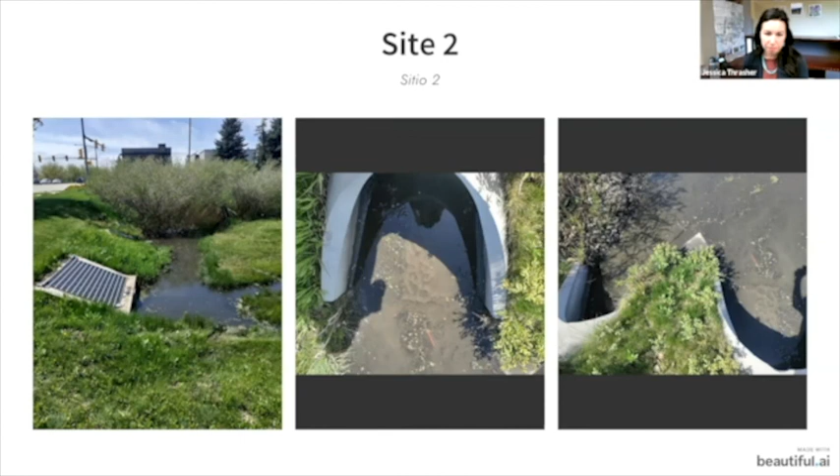So here's another viewpoint of what this EDB is doing, and it's confusing again—why was this installed this way? This would be another part where you could recommend upgrading from this well screen to the larger aluminum grate versus the well screen.

And they do have a safety rack right here, which is good, but they still are having lots of issues, lots of maintenance. And we're also seeing a ton of grass right here. So we'll be talking about that in a minute.

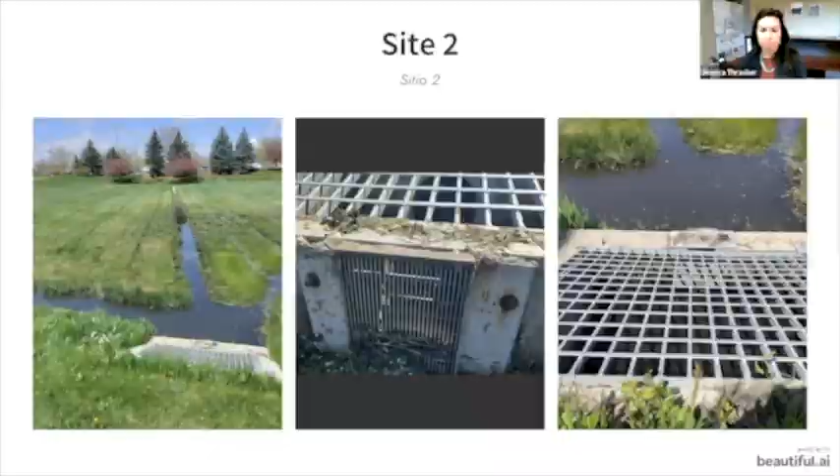72 hours after, same site. Now we see dead vegetation, we see a lot of sediment. So there is a lot of sediment that needs to be removed to maintain this site properly, and a lot of areas that can be improved.

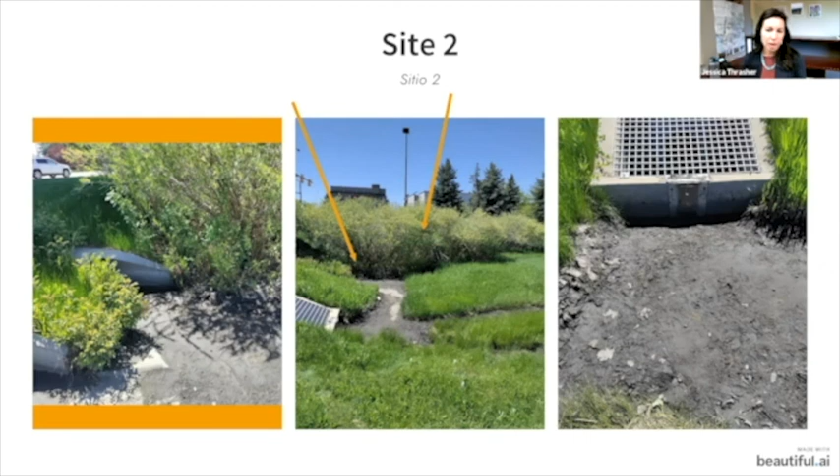And then once again, upgrading this well screen to a bar grate, because obviously they're not able to keep up—it's not sized properly for the amount of water that is coming to that particular outlet structure. And so now I'd like to invite Frank back to talk about Northern Water sites and some examples from a conversion that they are working on towards native grasses.

Sure thing, thank you very much, Jessica. This is a community in Fort Collins called Pelican Ridge. It's an HOA that had cool season Kentucky bluegrass for its common area along the back of the property, facing private property, and they sought to transition the cool season bluegrass into something that was less water intensive and more sustainable, yielding additional ecosystem services while still retaining the high quality stormwater performance requirements they had in their oversight.

This involved about 4¼ acres of a planned kill of the bluegrass using 2 applications of glyphosate. What they intended to do was seed it with native seed in a seeding ratio that would provide really deep, intense coverage, but after initial irrigation, lead to less water intensity. So they performed those 2 applications, and then did aeration with multiple passes—I believe 6 passes—to provide for percolation.